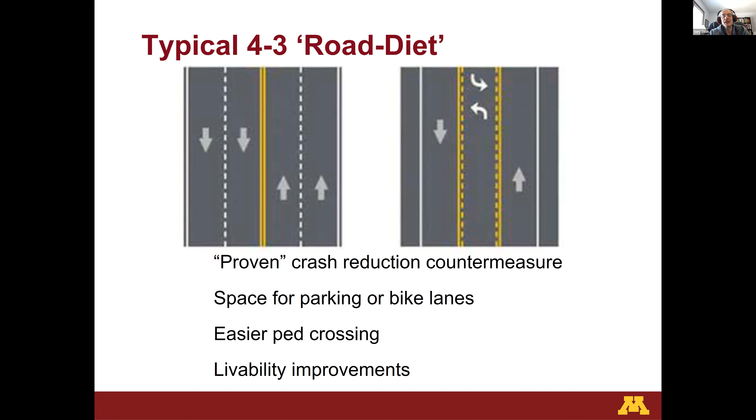But the interesting question is under what conditions will this reduction in capacity matter? The road on the left-hand side clearly has more capacity for through traffic than the road on the right-hand side. Under what conditions will this capacity reduction be more or less benign, so that we can take advantage of some of these other possible benefits from this conversion?

For this project, we started from scratch and identified 36 different design features having to do with 4-to-3 conversions. We wanted to see what the literature had to say about these, and identified almost 50 different sources that discuss these issues. The student working on this, Jingru Gao, compiled a summary table identifying which sources addressed which features. We presented this information to our technical advisory panel and asked them to rate which of these features they considered most important. Four of these came back as basically unanimous agreement among the panel members that they were important.

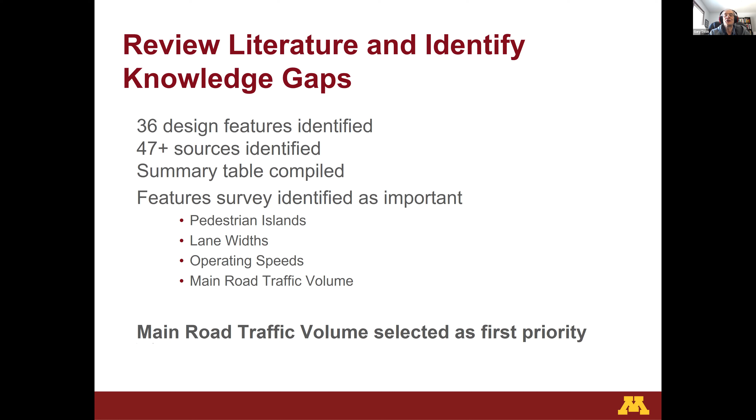In a discussion with the technical advisory panel, it was decided that we'd focus on main road traffic volumes as our first priority, in order to start identifying conditions under which a 4-to-3 conversion might be more or less benign. The literature on this topic is probably the most extensive of any of these design elements.

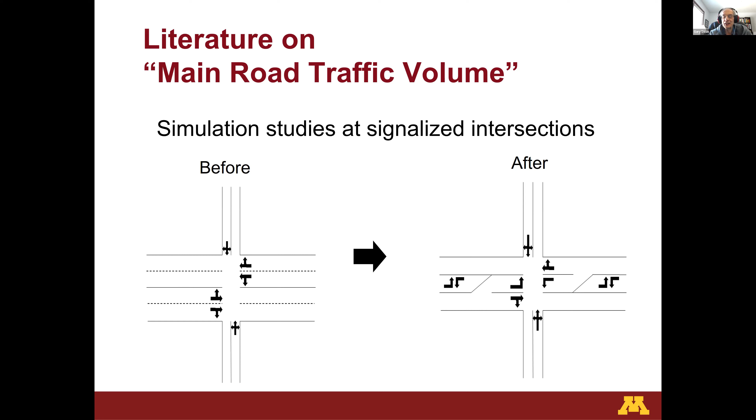A strong component of this literature is basically simulation studies at signalized intersections. On the left-hand side, we've got a signalized intersection with its turning movements illustrated, and on the right-hand side, we've got the signalized intersection as it might appear after a 4-to-3 conversion. Simulation software such as Synchro or something else is used to simulate the performance of this intersection in the before and after conditions, for a variety of different traffic volume levels.

We identified three studies we consider important that address this issue. The first was done at Iowa State almost 20 years ago. The recommendation from that study was, well, one of the things you have to think about here is that the guidelines are given in terms of average annual daily traffic, but you can't actually simulate an average annual daily traffic in a traffic simulator.

You have to actually specify a set of existing conditions in order to simulate. So the convention is to take your average annual daily traffic, cut it in half to get directional flows, and then assume that 10% of that daily directional flow happens during the peak hour. We'll use that convention in what we talk about further here.

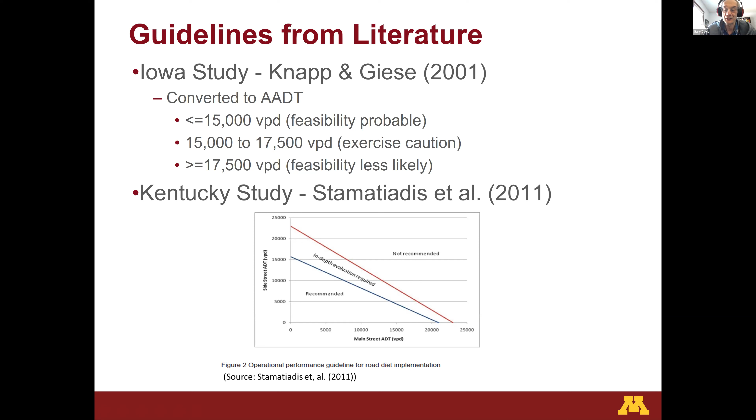A more recent study was done at Michigan State University. What they did was take a number of actual existing intersections with actual existing turning movements and simulated their performance, either with or without the 4-to-3 conversion. They came up with a much more restrictive recommendation.

Their recommendation was that at ADTs below about 10,000, the 4-to-3 conversion might work, but above that it becomes progressively more problematic. One of their findings was that because of variation in intersection geometry, turning volumes, and signal timing from site to site, they saw a fair amount of variability in performance. A detailed operations analysis should always be done.

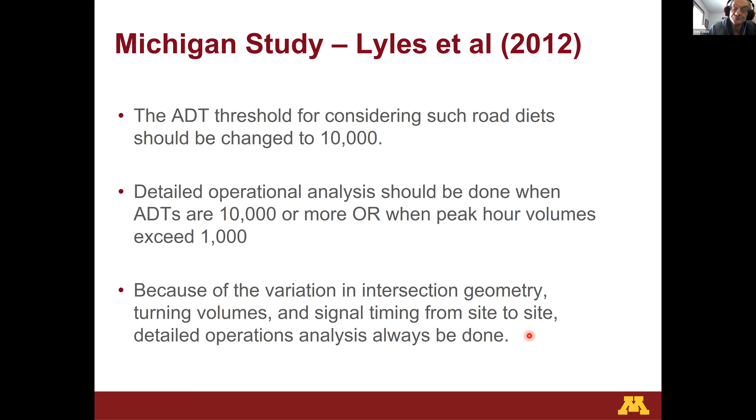In addition, in the literature there are several examples of sites that seem to be successful 4-to-3 conversions with fairly high average annual daily traffic volumes. We identified 3 of those in the literature, and essentially what we did was take a look at what sort of roads those were.

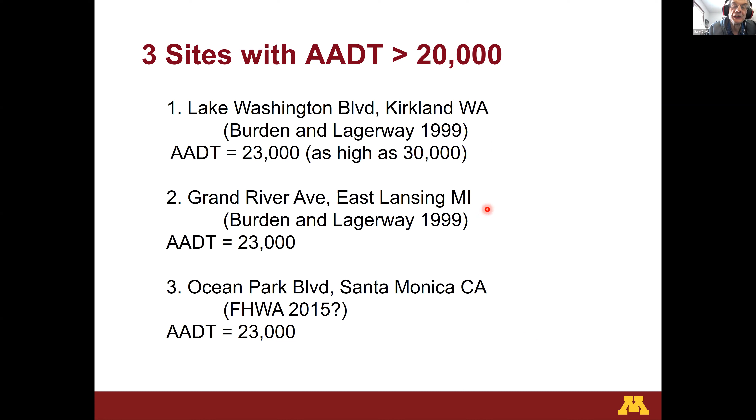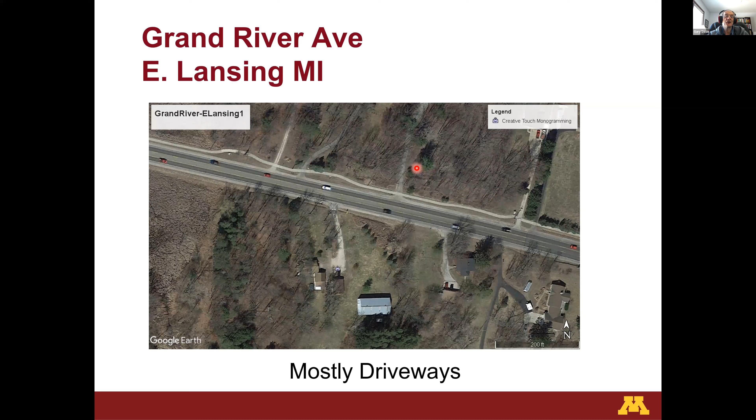Another one, Grand River Avenue in East Lansing, Michigan, has a configuration similar to Lake Washington Boulevard. Again, very few signalized intersections, and almost all connections to the road are simply driveways, without a lot of cross streets occurring along it.

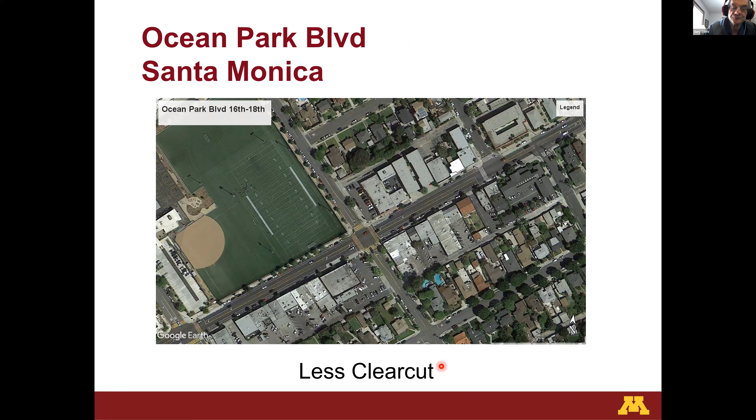So anyway, what we decided to do was another simulation study where we'd simulate not just intersections, but sections of road that underwent the 4-to-3 conversion. Essentially, we wanted to try configurations of traffic volumes that might support a 4-to-3 conversion with ADTs above 15,000, and try to identify the boundaries that define acceptable versus unacceptable level of service.

In discussion with our TAP, we picked 3 examples to do the simulation: a very short section of 50th Street in Minneapolis, a somewhat longer section of Minnetonka Boulevard in St. Louis Park, and a longer yet section of Baker Road out in Minnetonka.

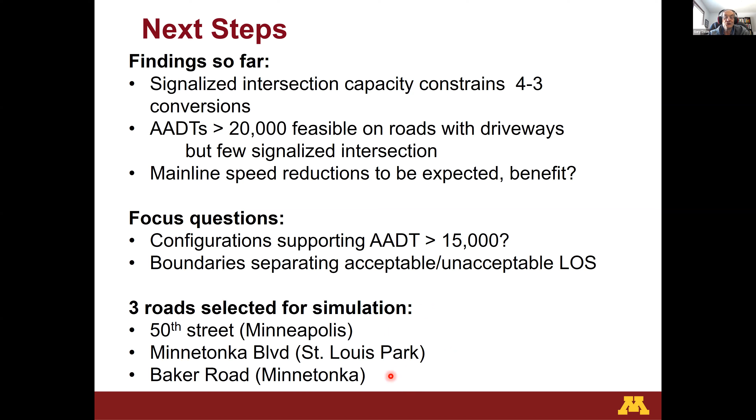So essentially what we did is a factorial experiment. We had 4 levels of major road traffic volume - 500, 750, 1,000, and 1,250 vehicles per hour per lane - with rough equivalents in average annual daily traffic given in parentheses. For each of those, we then looked at 3 levels of flow on the minor road or crossroad signalized intersections: 20, 40, and 60% of the target road flow.

And then at the unsignalized intersections, we again looked at 3 levels of flow: 50, 75, and 100% of the MUTCD limit for converting a two-way stop controlled intersection to a signalized intersection. This gives us a total of 4 times 3 times 3, or 36 possible combinations of these different input values.

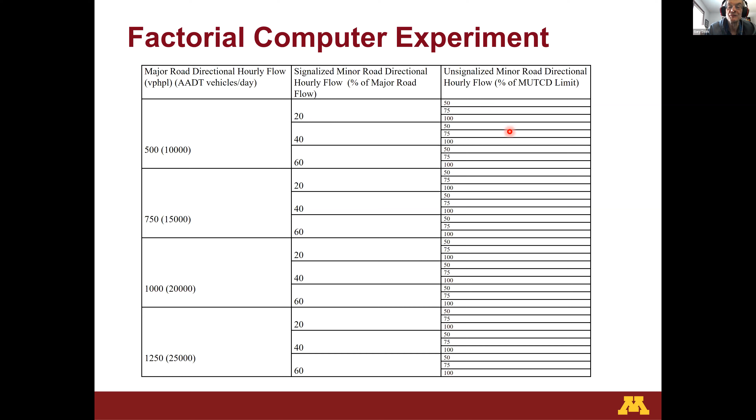For each of these 36 combinations, essentially what we would do is first time the signals, calculating the cycle length, split, and offset using Webster's method. Then we'd run 5 simulation runs with different random number seeds, and average the results for the 5 runs to come up with performance measures. We looked at delay at the signalized intersections, delay at the two-way stop controlled intersections, and speed and delay on the main road links, and summarized the results.

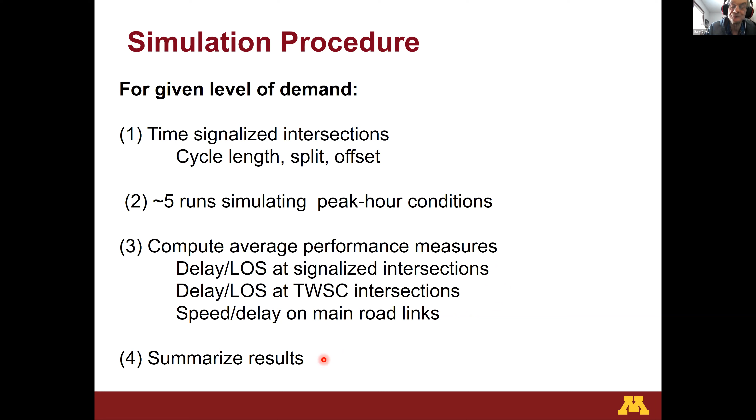All right, turning movements. The main point I want to make about turning movements is that we selected turning movements on the crossroads so that we preserve that main road flow all the way through the simulation section. For instance, here we've got 75 vehicles an hour turning left off the target road, and 75 vehicles an hour turning left back onto the road at this crossroad, so that we preserved our main road traffic flow all the way through the simulated section.

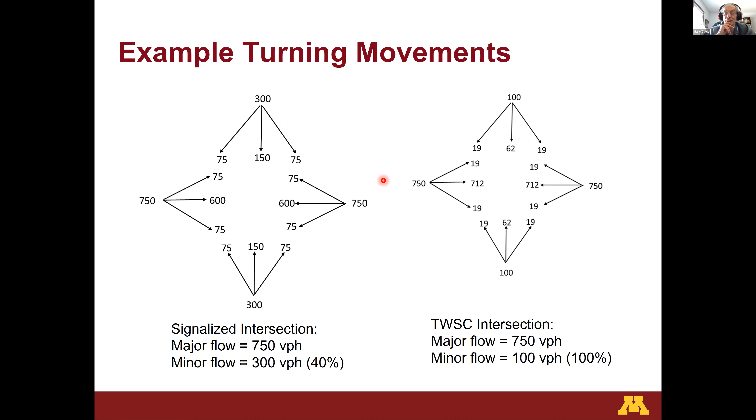So let's take a look at some of the sites. I'll go through these fairly quickly. The first one was this 50th Street in Minneapolis. It's a fairly short section, only 0.2 of a mile long. There are 2 signalized intersections at the boundary of the simulation section, and then 2 unsignalized two-way stop controlled intersections in between.

Here's an example of the simulation model that Jingru Gao put together using a software called TransModeler SE. So here's Chowen Avenue, that's one of the signalized intersections. Here is Zenith Avenue, that's another signalized intersection. Beard Avenue, this is a two-way stop controlled intersection. And Abbott here, that's another two-way stop controlled intersection.

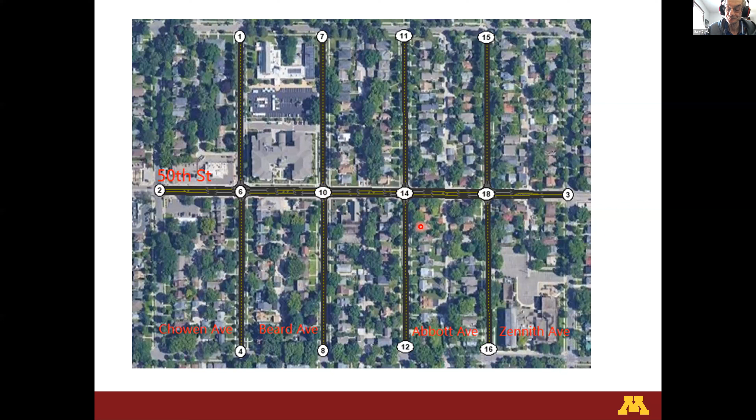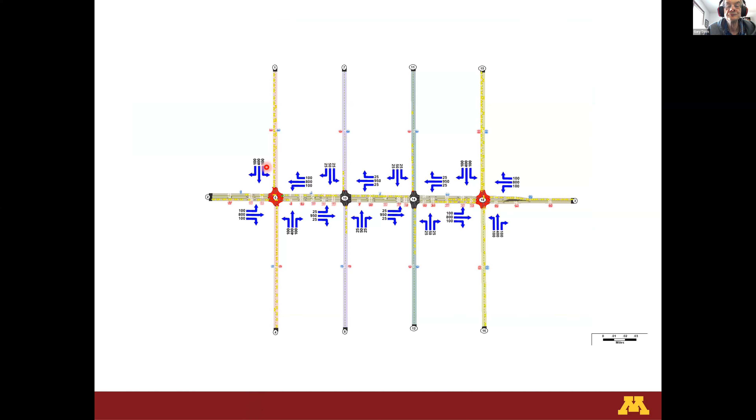I don't seem to have my animation working here, so we'll just kind of skip over that and move on.

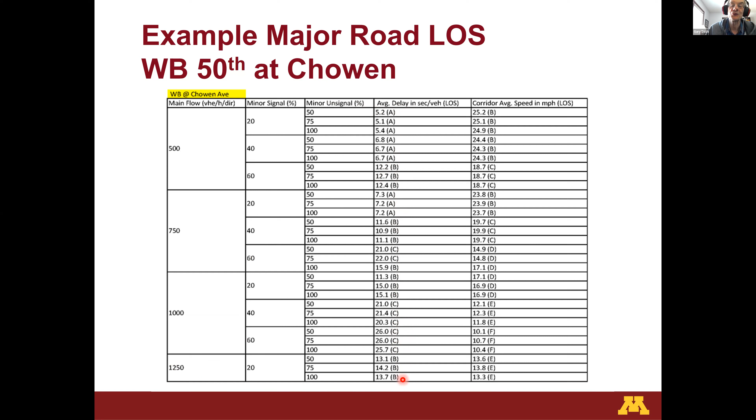The thing I want to point out here is that for this direction, 50th is our target road, Chowen is one of the signalized intersections, so we're talking about flow on the target road at a signalized intersection. What we see is that the level of service is pretty good all the way through all these possible volume combinations, even going up here to 1250, which roughly corresponds to an average annual daily traffic of 25,000. Under these conditions that we simulated, there doesn't seem to be much of a problem, at least for the folks actually using 50th to go straight through, from point A to point B.

When we look at one of the crossroad approaches at the signalized intersection, this is northbound Chowen at 50th, on the other hand, in order to try to show what's going on a little bit more clearly, what we've got here is our different levels of main road traffic flow, our different levels of crossroad traffic flow, 20, 40, and 60% of the main road. And we've also done some intermediate simulations between 750 and 1,000 to try to refine the boundary where level of service breaks down.

So for instance, when we've got 500 vehicles an hour per lane for the main road flow and 20% of that is on the crossroad flow, we get level of service B for this crossroad traffic. As the main road flow goes up, but we're still restricted to 20% of that, we get all the way up to 900 vehicles per hour per lane, or roughly an ADT of 18,000, still at level of service D. And here we cross over into level of service F.

And then as the flow on the crossroad increases, this boundary between acceptable performance and unacceptable performance starts moving in this negative direction. And only for this fairly low crossroad demand do we get this acceptable level of service somewhere around 10,000 ADT.

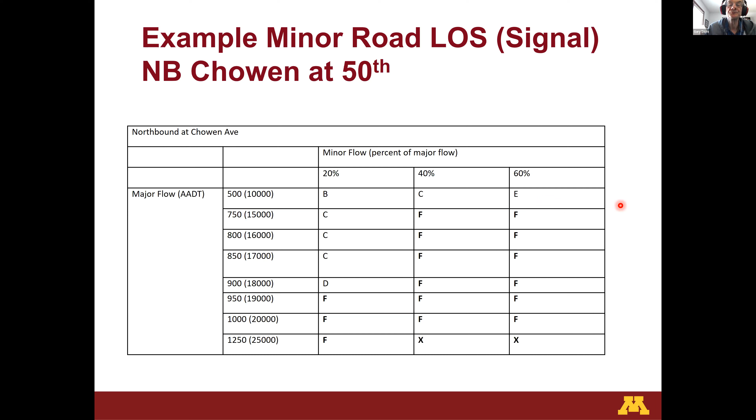Let me look at an example minor road flow at a two-way stop controlled intersection instead of a signalized intersection. We see a pattern roughly similar to what was happening at the major road or at the signalized intersections, but somewhat less extreme.

When we're at 50% of the MUTCD limit, we can get up to an ADT of maybe 19,000. But the boundary between level of service F and not level of service F shrinks to some extent as the minor road flow demand increases.

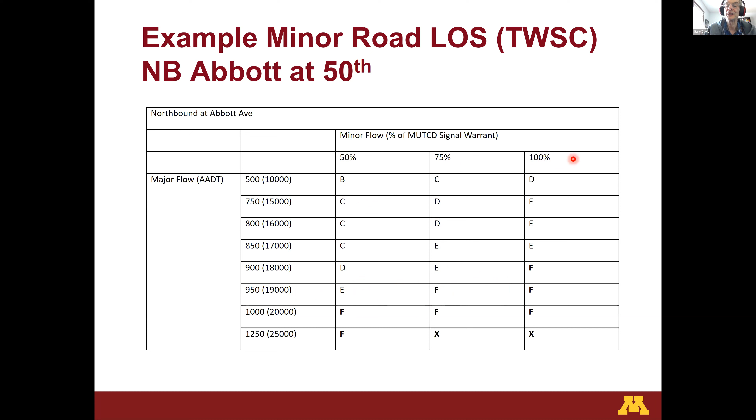So what did we find here at 50th? On the target road traffic, we got acceptable level of service, both at signalized and two-way stop control levels, at hourly volumes greater than 750 vehicles per hour per lane, or ADTs greater than 15,000. That's on the target road flow on 50th.

On the crossroad approaches for signalized intersections, we got substantial deterioration in the level of service when the target road flows are greater than 750. And on the crossroad approaches for two-way stop control conditions, again level of service F conditions appear at target road flows increasing from 750 to 1,000, depending on the level of crossroad flow.

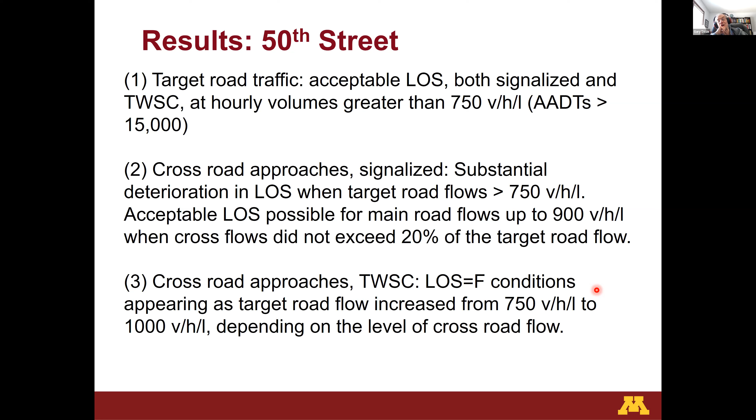I'm using up a fair amount of time here, so let me go through the next two sites fairly quickly.

Our Minnetonka Boulevard site was a bit longer, 0.7 of a mile. It was bounded by two signalized intersections, one at the junction for Trunk Highway 100 and one at Inglewood Avenue, and then it had a signalized intersection inside it as well at Ottawa Avenue. It also had three four-legged two-way stop controlled intersections and three T-intersection type two-way stop controlled intersections.

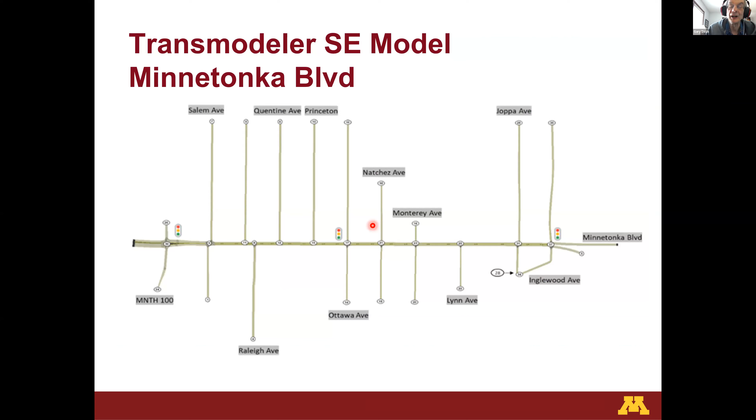Here's a little picture of it. Here's Minnetonka Boulevard, here's Inglewood over here, here's our junction for Trunk Highway 100, and here's our midpoint signalized intersection. There's our TransModeler SE representation for what this example ended up looking like.

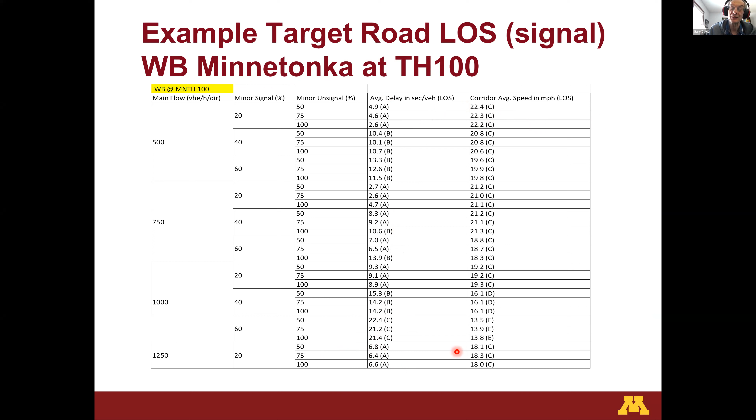Here's an example output on the target road, which is Minnetonka Boulevard. So here's westbound Minnetonka at Trunk Highway 100. We see a pattern pretty much similar to what we saw with 50th Street on the target road at the signalized intersections. We're getting acceptable level of service even at fairly high volumes, again starting to bump up on this boundary that corresponds roughly to AADTs of 25,000.

When we look at crossroads at the signalized intersection, we again see a pattern similar to what we saw for 50th. The crossroads level of service deteriorates fairly quickly after roughly 15,000 ADT, and deteriorates even more quickly when we have these higher levels of crossroad traffic volume.

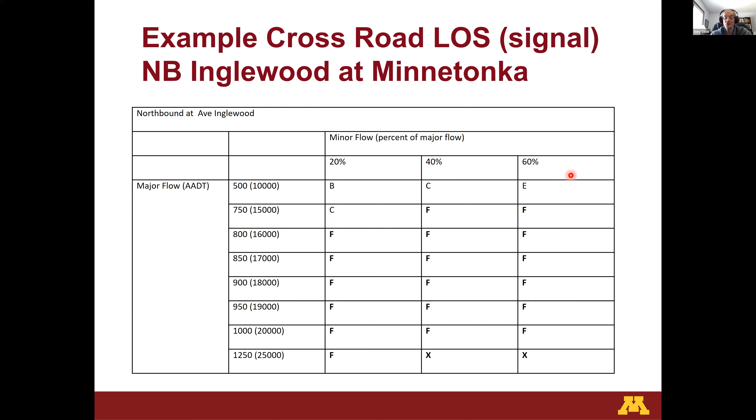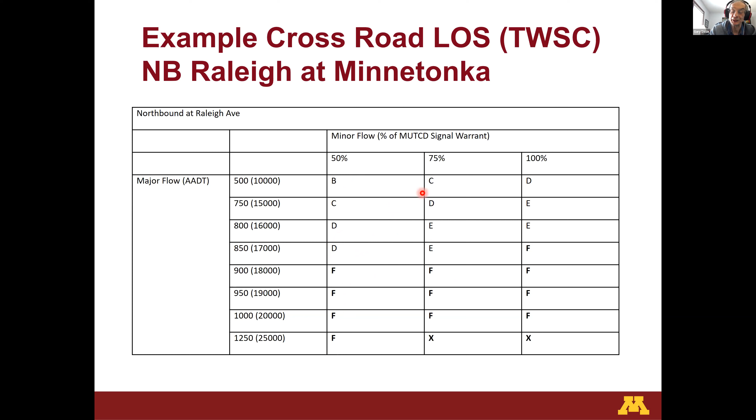A similar pattern appears at the two-way stop controlled intersections. At the higher ADT levels we're getting level of service F, but at some of these lower volumes we can again have roughly acceptable performance, depending on the volume on the minor road. So essentially we found a pattern here on Minnetonka Boulevard similar to what we saw at 50th Street.

If all we do is focus on the traffic volume on the target road, things look pretty good, even at fairly high ADTs. The main effect of the conversion is being felt at the crossroads, either at the signalized or the unsignalized intersections.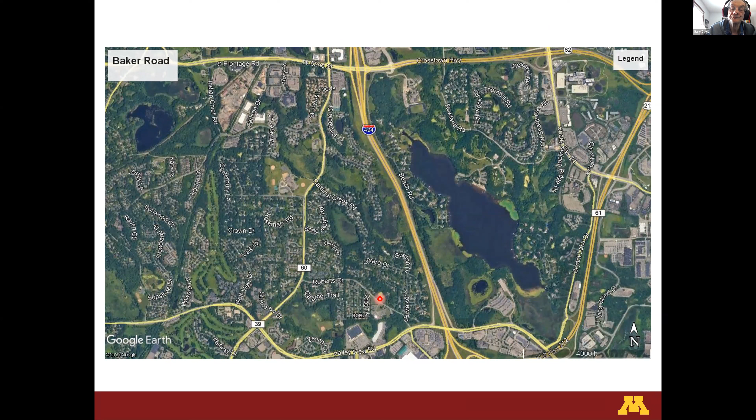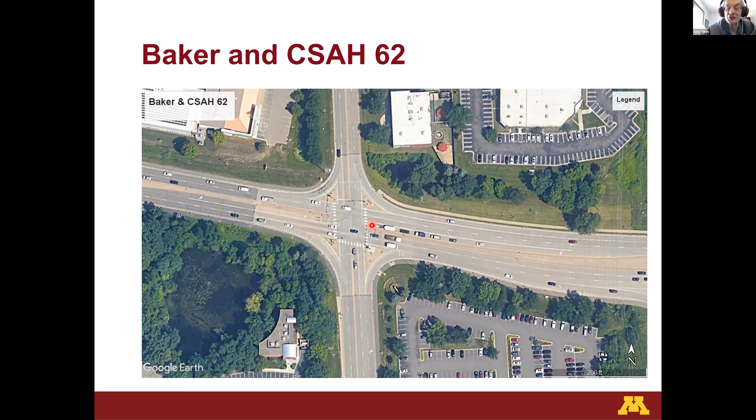Here at the Baker Road site, the signalized intersections that define the boundary are definitely major roads. We have much higher capacity at these signalized intersections than we saw in the previous two examples, and that's going to make a difference in the results we got.

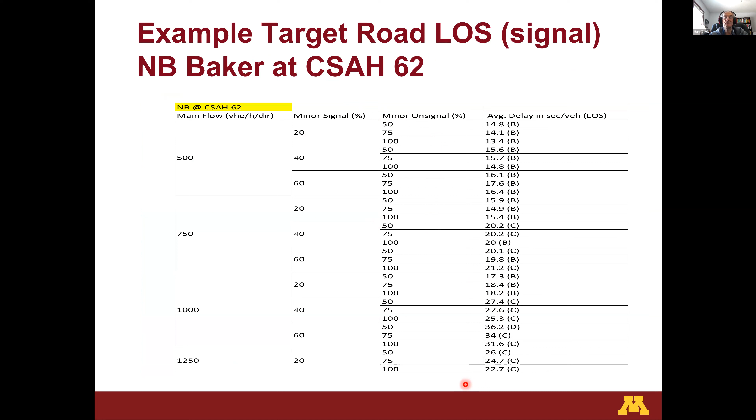So again, our target road is Baker. Here's northbound Baker at one of the signalized intersections, and we see a pattern similar to the other examples, with a fairly decent level of service even at fairly high corresponding average annual daily traffic levels.

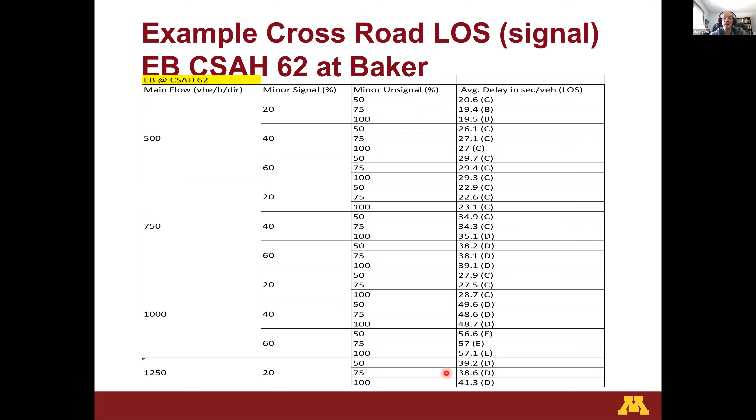For the crossroads at the signalized intersection, here's the conditions on Highway 62 at Baker. The much higher capacity this road has means we essentially see a level of service pattern on the crossroads similar to what we're getting on the target road—decent level of service all the way down to these fairly high traffic volumes.

Looking at the target flow on a crossroad—this is Holly Road at Baker, for instance—the pattern is similar to what we saw on the two-way stop controlled intersections at the other two examples. Once again, we get decent level of service as long as the demand on the crossroad is not too high, and then it tends to break down a little when we move up to these higher volume levels.

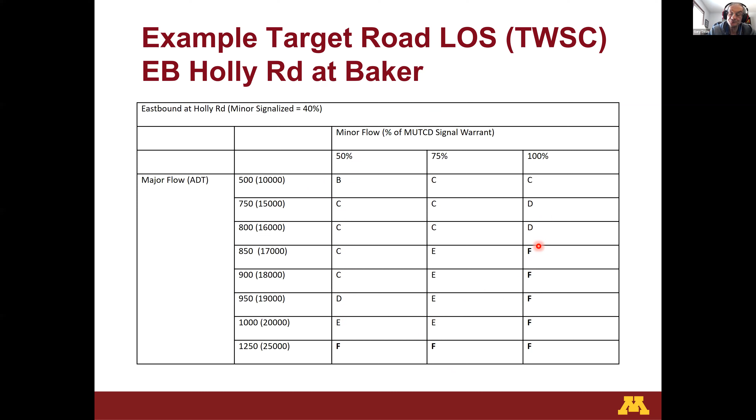And so at Baker Road, in part the results were similar to what we saw at the other two on the internal intersections. The main difference here was that the signalized intersections at the boundaries had much higher capacity, so we didn't see the flow breakdown that we saw with the preceding two examples.

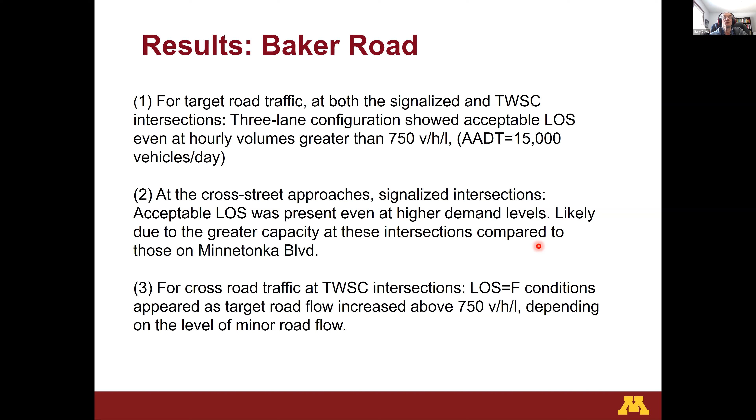So just to summarize what we found: if you're thinking about a 4-to-3 conversion, the first thing to worry about is that the signalized intersections are going to be a main constraint. If you don't have enough capacity at the signalized intersections to deal with the higher volumes, then the 4-to-3 conversion is something that requires some thought, determined both by the capacity on the target road receiving the conversion and the capacity available on the crossroads.

If the signalized intersection capacity is okay, the next thing to worry about is what's going to happen at unsignalized intersections in between the signalized ones. Here we've got a different phenomenon operating: capacity at signalized intersections is governed by signal timing, while capacity at unsignalized intersections is governed by gap selection. So it's the effect of the 4-to-3 conversion on the availability of gaps that determines whether the conversion will be benign or not.

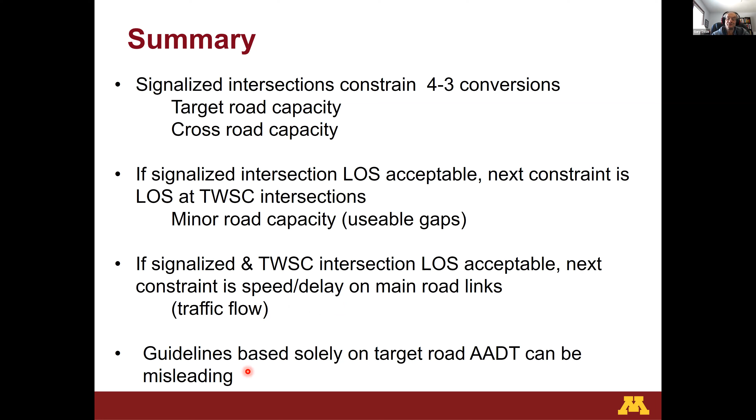And with that, I'll wrap it up. Eventually we'll be available for questions and discussion. Thank you.

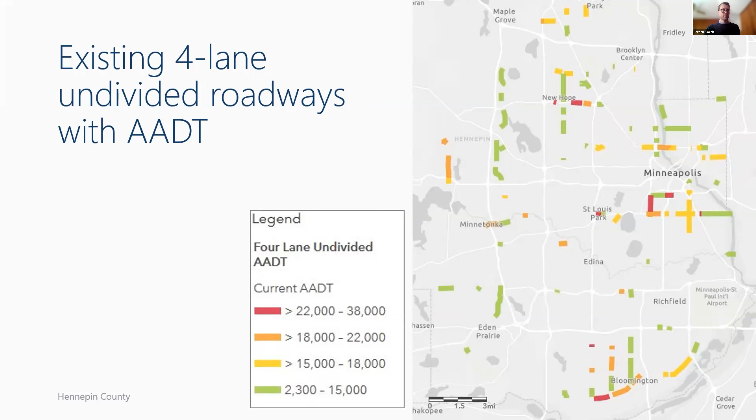But we're still evolving and learning as we go, implementing new best practices and new ideas. We get a lot of our guidance, as Professor Davis noted in his presentation, from FHWA as well.

The first bullet there, you typically see a 19 to 47% reduction in crashes. I think our data generally bears that out when we've evaluated our 4 to 3-lane conversions, and then there's that hourly volume guidance.

Is the peak hour below 750 vehicles, between 750 and 875, or above 875? We tend to adhere to that pretty closely, and generally it matches with what we're seeing when we do operational analysis or modeling on a corridor. We find that guidance to be a pretty good fit for us.

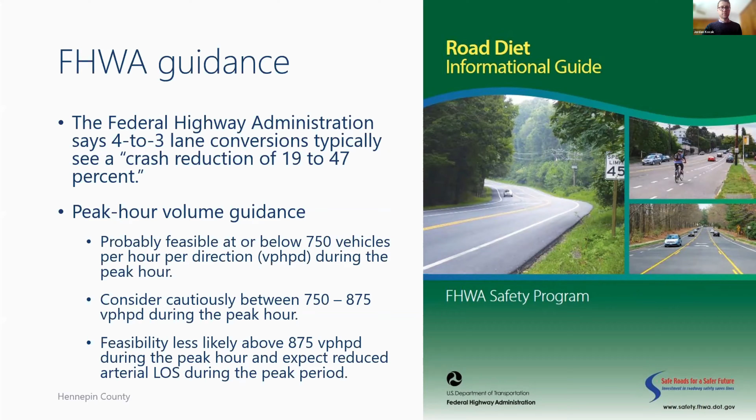So then I'll talk a little bit about this—we're calling it our 4 to 3-lane roadway conversion study. And why are we doing this study?

A big piece is to better understand operational impacts and trade-offs of doing 4 to 3-lane conversions on our system. We have varied professional opinions about what acceptable trade-offs are, and what the right vehicle volume thresholds are.

So we see this study as a way to establish a consistent county practice, a consistent approach when we're considering converting a roadway. To date, it's really been on a project by project basis, and we hope this can help us have a better starting point when those opportunities arise.

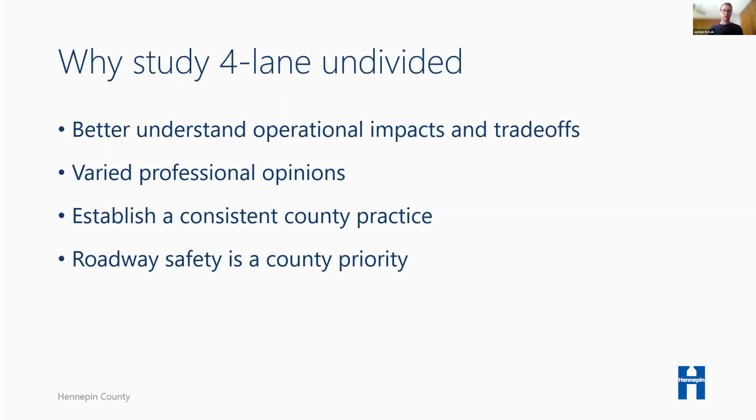And then finally, roadway safety. As noted earlier, converting a 4-lane to a 3-lane roadway can have really big safety benefits and crash reduction, and roadway safety is a big priority for us at Hennepin County. So that's a big factor in some of the decision-making process.

The study is still underway. We do have some of the tasks completed, so I'll share some preliminary results. But this is generally all of the tasks we're looking at in the study: a literature review and peer assessment, before and after assessment, capacity guidelines, high-level screening analysis, and then a detailed analysis.

We do have the peer review preliminary results, so I'll talk about some of those. We asked our peer agencies a series of questions. Those agencies are Washington County, Richfield, Scott County, Minneapolis, Dakota and Anoka County, St. Paul, Ramsey, Hennepin County, and MnDOT.

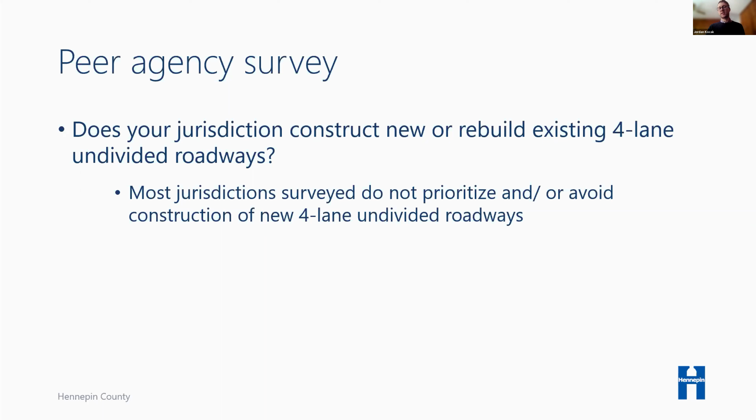The next question we asked is, does your jurisdiction construct new or rebuild existing 4-lane undivided roadways? Most respondents said they do not prioritize and/or avoid construction of new roadways. I think this shows that by and large, agencies are trying to move away from the 4-lane undivided cross section. Often it's a 3-lane, not always—sometimes it could be a 5-lane or 4-lane divided section—but it shows that people recognize that the 4-lane undivided roadway section isn't something we want to continue building into the future.

And then the last survey question we asked: are there recent or completed 4 to 3-lane roadway conversions in your jurisdiction? And for any recently completed, can you offer best practices or lessons learned?

We received a lot of responses. These three I just felt were somewhat representative of the overall responses.

We consistently found that conversions significantly reduce crashes and operate well. The project required a lot of communication and education, but led to a community accepted project. And three lanes likely have more capacity than many think, and can outperform operations of a four-lane undivided segment in the right circumstances.

I just want to go back to that second bullet. In my experience, having done a number of four to three-lane conversions and been part of the community engagement process, that sentiment really rings true to me. I think on the back end, we do modeling. There are other factors that come into play, but the community engagement, if you actually want to go out and implement it, is a really big factor.

And it really varies community to community. In the city of Minneapolis, for example, we have residents who are asking us to implement three-lane conversions. Then we go into some of our other suburban communities, people are less familiar with the benefits and the operation of a three-lane, and more education is needed to help those residents understand why we're making the decisions that we're making. So I think when you go out to implement, that's really a big key, is letting the public know why and how it will benefit them.

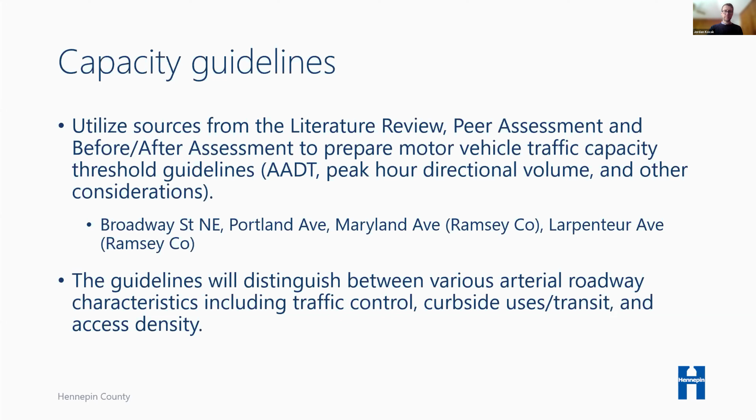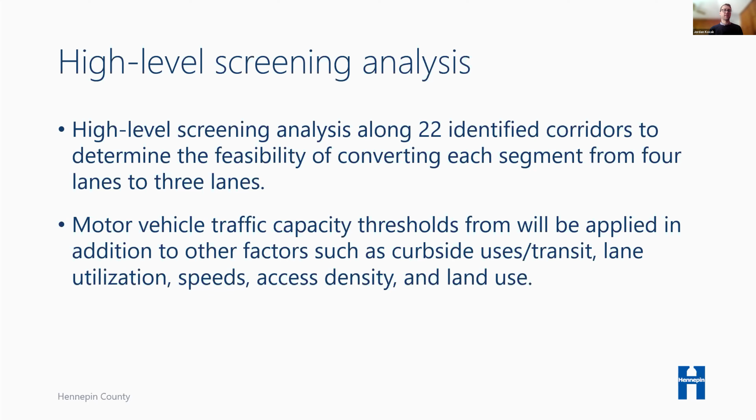Then we're going to do a high-level screening analysis, looking at 22 corridors on our system. It's basically all outstanding four-lane undivided roadways on our system that aren't already planned or programmed. Again, looking at motor vehicle traffic capacity thresholds, such as curbside use, transit, lane utilization, speed, access density, and land use. And then finally, we'll look at a detailed analysis where we'll select 10 corridors and really drill down on those, and look at them in a lot more detail, do traffic operations analysis using Synchro and SimTraffic, and bring in a safety analysis.

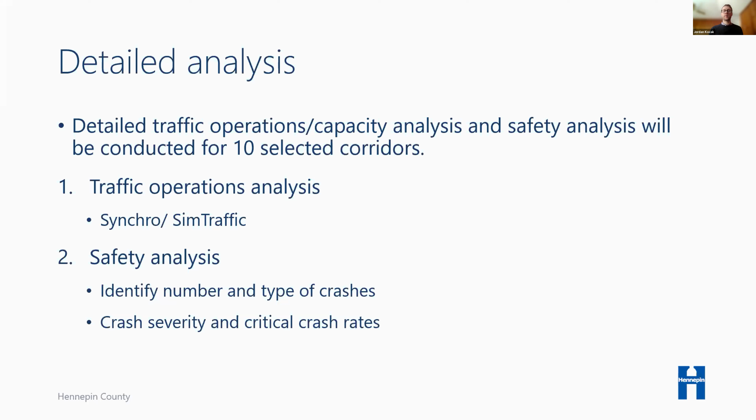I mentioned earlier that safety is a really big consideration for Hennepin County. So we want to be cognizant that for us, decision-making might not only rely on what the traffic operations look like. There might be trade-offs that come into play where we could be willing to accept some operational impacts if we know that we're going to get bigger safety benefits. So more to come on that study.

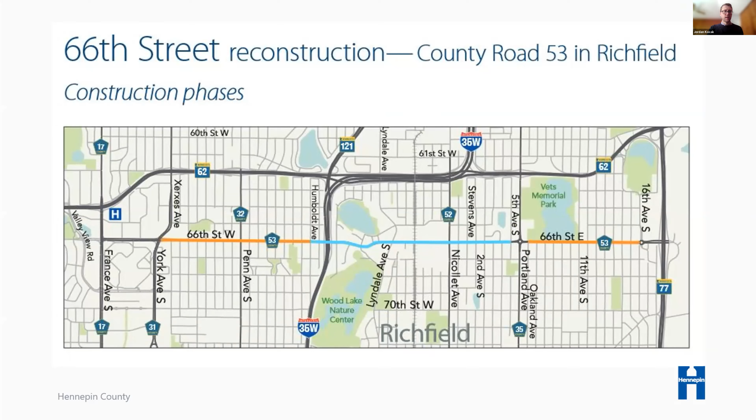And features of the reconstruction: it was a full reconstruction, upgraded utilities and drainage, stormwater management. We implemented raised medians in a lot of areas with two-way left turns to separate traffic, provide a safer pedestrian crossing. Like I mentioned, some sections were three, some were five lanes. We implemented dedicated bicycle facilities separated from motor vehicle traffic, as well as enhanced pedestrian accommodations. All curb ramps were ADA accessible, traffic signals upgraded and accessible. Roundabouts at Lyndale and Nicollet Avenues, in addition to an existing one at Portland, streetscaping improvements, and improvements to bus stop waiting areas.

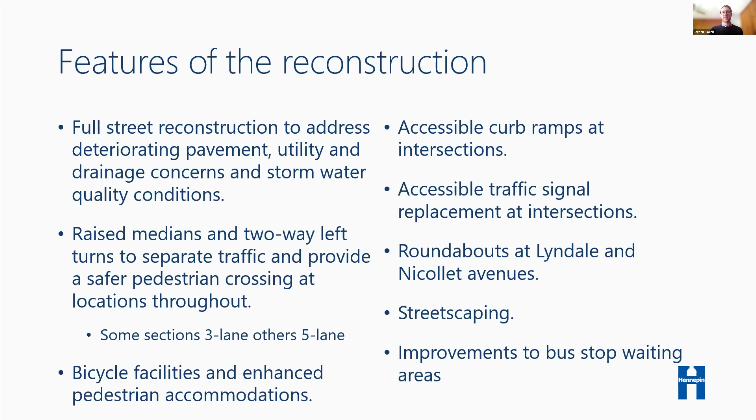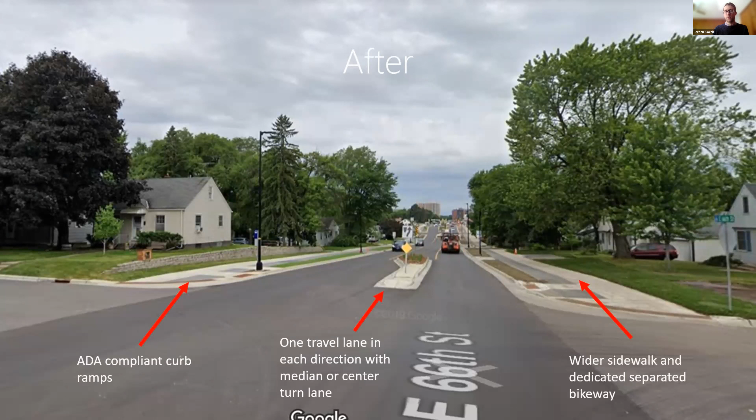We've made things ADA compliant. We added 1 travel lane in each direction with that center median and center turn lane. This image has both, kind of a left turn pocket. And wider sidewalks are set further back from the roadway. The black line on the sidewalk area is a dedicated bike way or cycle track. So in addition to doing a 3-lane, we're making the street more of a complete street that accommodates comfortably more modes of travel.

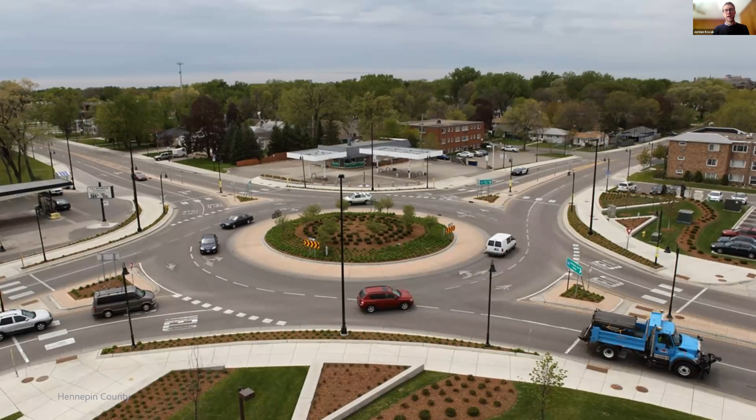This is just the image of one of the roundabouts. The roundabouts have RRFBs to help facilitate people walking and biking to get through them. You'll also notice most of them kind of expand a little to this 4-lane, 2 lanes in each direction to get through the roundabout and then go back down to the 1 lane in each direction.

I'll get into a little of the crash data, the results we're seeing from before and after implementation. Our before years are 2014, 15, and 16. Our after years are 2019, 2020, and 2021. So before, we had a crash rate of 5.07. You can see a pretty big reduction there. Additionally, the crash severity rate shows a reduction, and the total number of crashes is seeing a reduction.

And just for a little context, our average crash rate for a 4-lane undivided road in Hennepin County is 1.16. So the before crash rate was well over that. And then just in general, total number of crashes, we're seeing a 29% crash reduction.

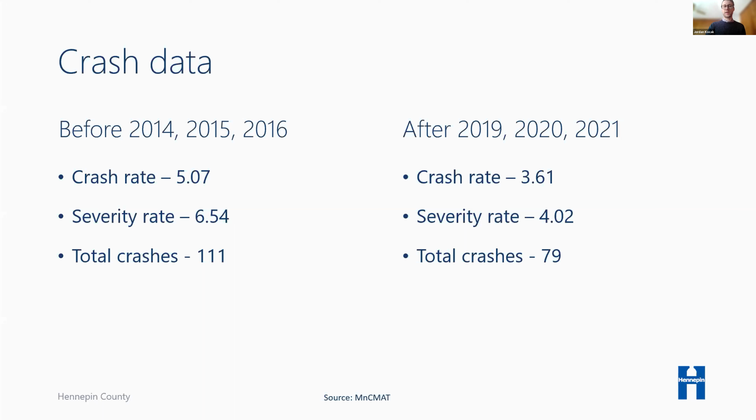So that is in line with the FHWA guidance on the sort of crash reductions you might see when you implement a 3-lane. Then to get a little more detailed with crash types, the dark blue is the before years and the light blue are the after years. Here I've just broken out by crash type. Starting on the left-hand side, you have right angle crashes. We actually saw right angle crashes increase.

And I don't have a really good explanation for that, other than to say in 2019, where you do see a big increase in right angle crashes, there were still some punch list items happening on the corridor. So maybe, maybe some driver confusion, people still getting used to the new roadway reconstruction. I don't really know.

Next one over is left turns, and there you see, so far in the after condition, we've seen no left turn crashes, which is great. Rear end crashes are next, and that has stayed about the same between before and after condition. And then finally you have side swipe crashes. Again, we've seen a pretty big reduction in side swipe crashes with this new 3-lane configuration.

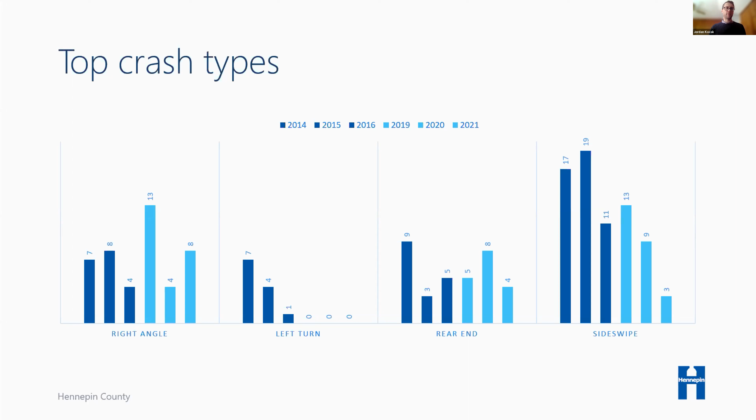So I think, especially looking at the left turn and side swipe crashes, which are very common crash types on a 4-lane roadway, it's good to see these results showing that when you implement a 3-way or 3-lane roadway, you see these sort of crash benefits, crash reductions occur.

I did have a StreetLight analysis done for this corridor as well, just to look at how things are operating in a before and after condition.

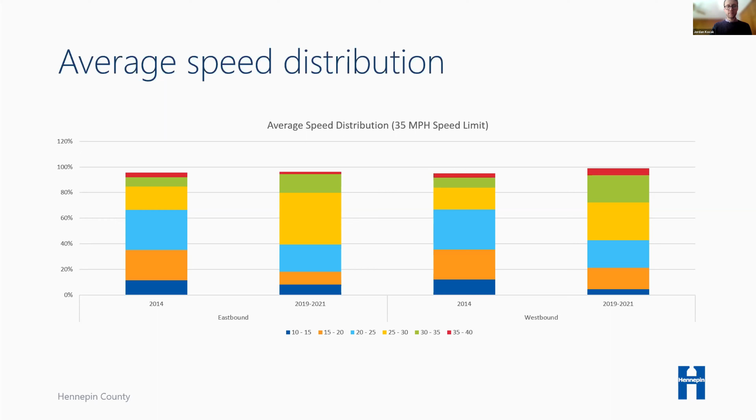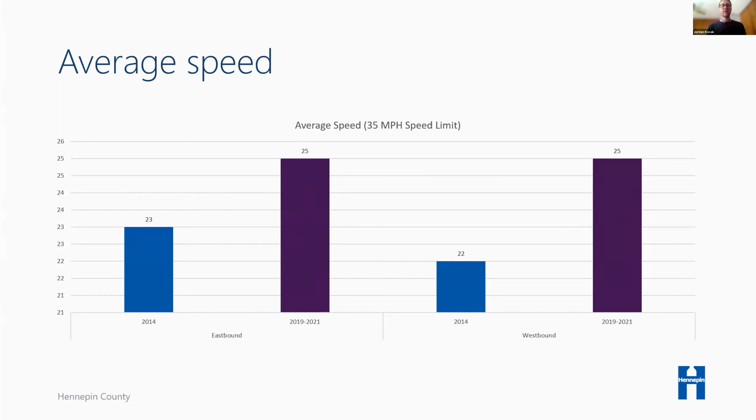That bears out in the average speed as well. Again, the leftmost 2 bars are eastbound, rightmost 2 are westbound. Blue is before and purple is after. We're seeing a couple mile-per-hour increase in the average corridor speed, from 22 or 23 to 25 miles an hour. And average corridor travel time follows the same pattern.

And so with that, that is my portion of the presentation. I think we're moving on to Q&A. Thanks, Paul.

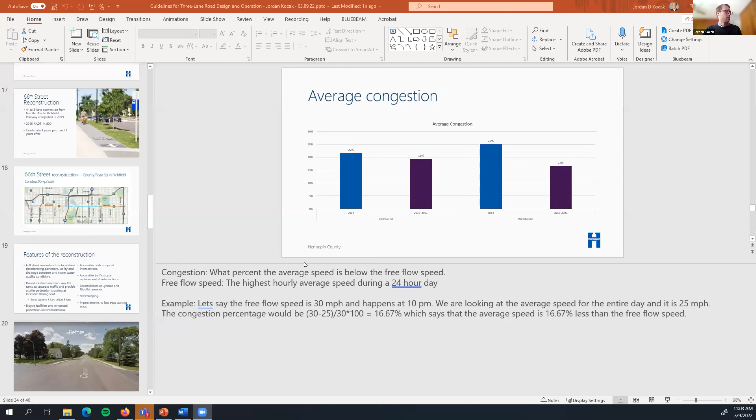Does that— no, it was down. It was the before and after. That one? Yeah, okay, this is a great treatment. It really looks great. I had a couple of questions.

So, like where the light poles were and all that, was there utility relocation and drainage issues that had to be moved, or am I mistaken? Well, you know, redoing the utilities and correcting some drainage issues were part of the project. I'm sorry, I don't have enough detail to get too specific with you, other than those were parts of the reconstruction project.

Yeah, because I've seen, you know, it's tricky to evaluate how much things cost. Sometimes it's easy to do this while maintaining the roadbed where it is and put the bike lanes in the road area, as opposed to off the street like this, if you know what I'm saying. How do you evaluate whether to do a treatment like this or something less expensive where the bike lanes are in the road? Well, at least at Hennepin County, undergrounding the utilities like we did here requires partnership from the city. That's usually an above-and-beyond scope item in our funding for these projects, so we typically don't do it unless the city is going to be the cost-sharing partner. That would be one consideration. And then, you know, those utilities do take up space, and that can play a role in how the bikeway and sidewalk are designed.